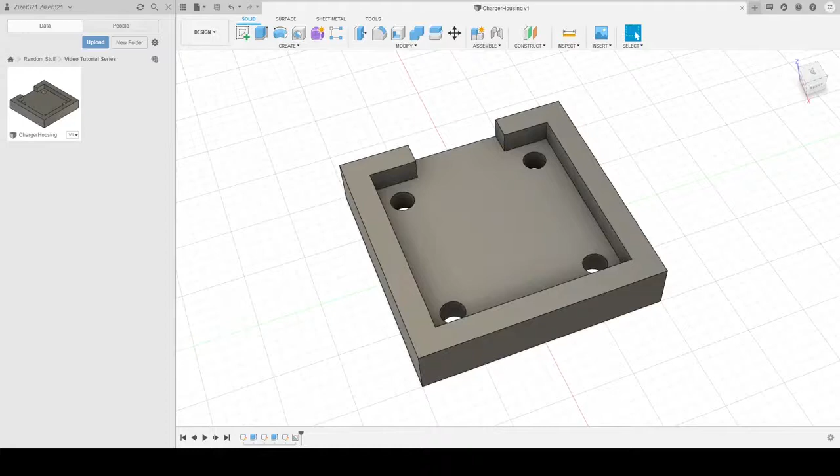Hello guys, so this is, I guess it could be called lesson 5, but that's a little bit misleading since this isn't actually a continuation of our first charger housing design. So go ahead and save that locally, not to our FTC folder, and go ahead and you can open up a new design. But we aren't going to do anything with this yet because we're going to install something from

goBILDA's website. So I'm actually going to head over to goBILDA and I'm going to navigate myself to pattern plates, and I'm going to click on one of these. So let's say we wanted to use this in a design, which in this case we do. All we have to do is go to the descriptions, downloads, and left click on this, and we'll have an option of where we can download this, yet it is unfortunately not visible in the recording software I'm using. And then you can hit save, but I've already done this, so I'm going to hit cancel.

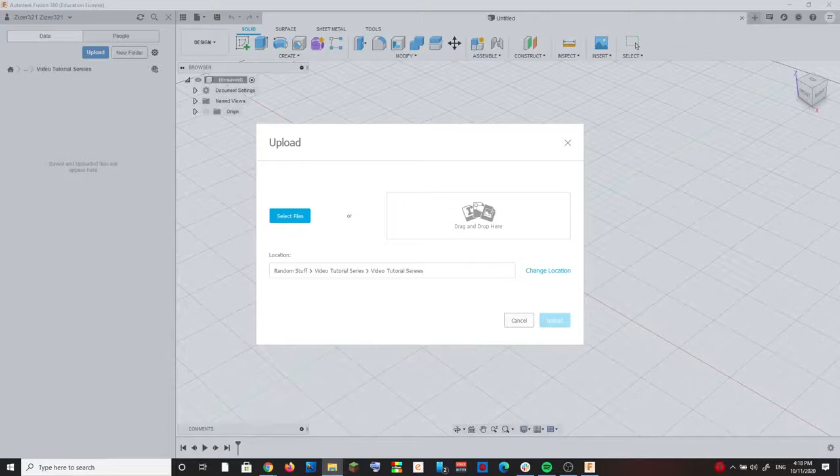And then by navigating back over to Fusion360, I can import it by drag and dropping. So even though you guys won't be able to see this, I'm going to open this up in another tab because I have a dual monitor setup, and I'm going to hit upload on Fusion360, and you see where it says the drag and drop option. I'm simply going to drag and drop my step file here. So then I can actually drag more in, and since I'm going to be using two different files, both from goBILDA's website, downloaded in the same exact way, I will hit upload.

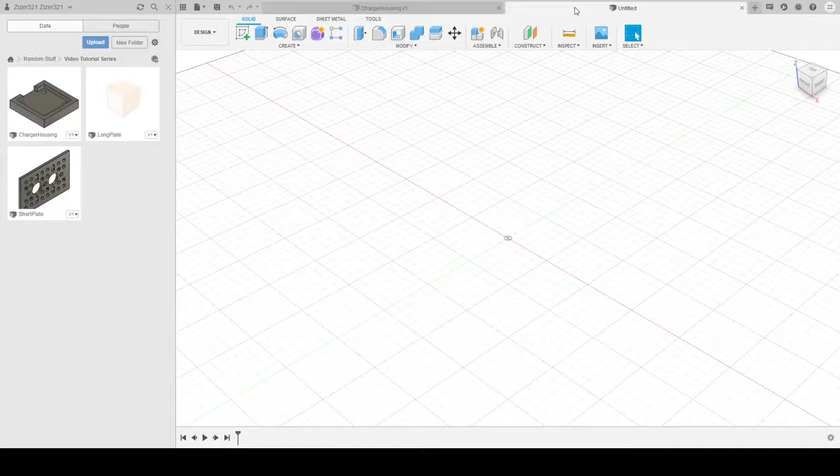I will close it down, and I will, in my untitled folder, save it. Because if you don't save it, you can't insert components. So I'm going to actually hit Control S. And I'm going to name this, let's make our charger housing component. So now, because I have saved this, I can drag and drop these in here. So I'm going to drag my short plate in, which might take a second.

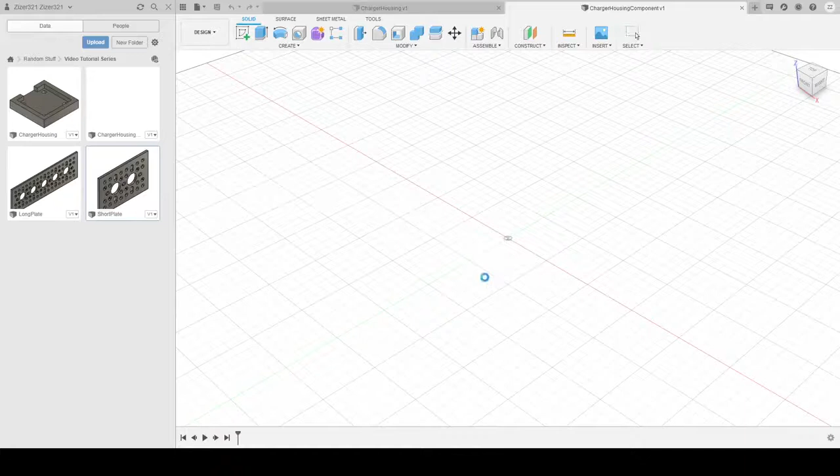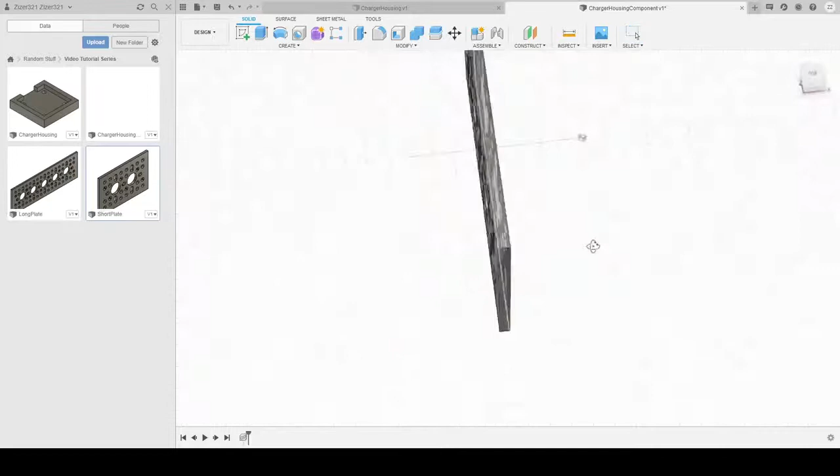And once it is in here, you'll notice that I can actually move this around to wherever I want it to be. So in my case, I'm going to move it to the origin by dragging this so the center is roughly at the origin. And ultimately this doesn't matter too much because all the components are going to be assembled later. And then I'm going to do the same for the long plate right here. And it will be in here. And now I'll drag this somewhere, maybe above it. I'll click OK again. And now I can show how these are going to be assembled together.

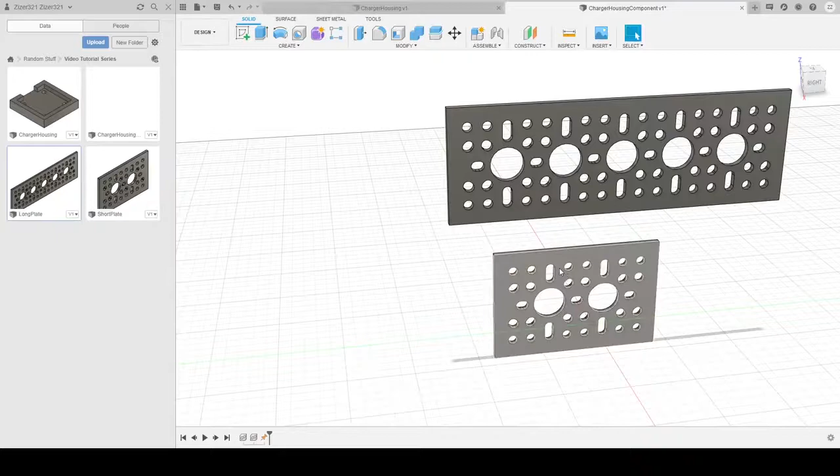So to start, I'm going to ground this short plate right here by right-clicking and clicking ground. So now you'll see I can't drag this around. I'm left-clicking and I can't drag it. But this one I can. So I'm able to drag this one around, but not this one. So now I can apply a joint between these two plates. And this one won't move, but this one will be able to move if we were to choose a joint

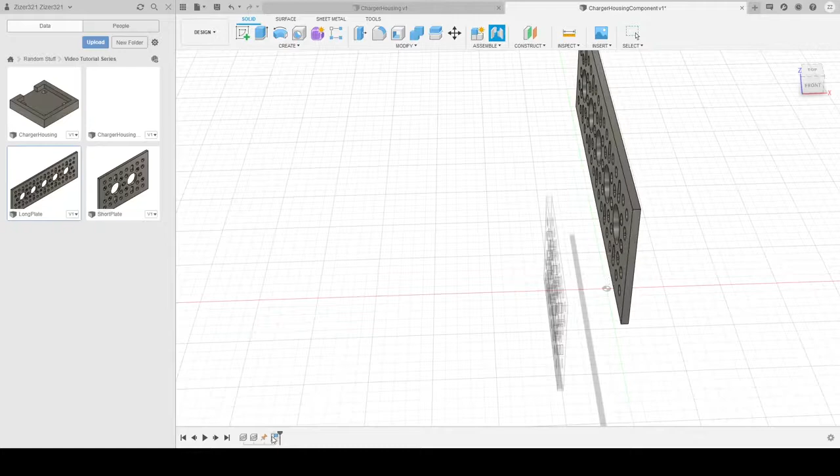type such as that. So to begin this, I will go up to Assemble and I will hit New Joint, Capture Position, which basically saves the current position of all the objects so that in your timeline it will work correctly. And then I'm going to select this right here and this right here. So you see this little animation that hopefully will show how they will be assembled, how they'll snap together. Now I can drag this, change the rotation, and actually I can even drag this, but this is somewhat counterproductive almost, because the reason we're even using the offset in a lot of cases is to align

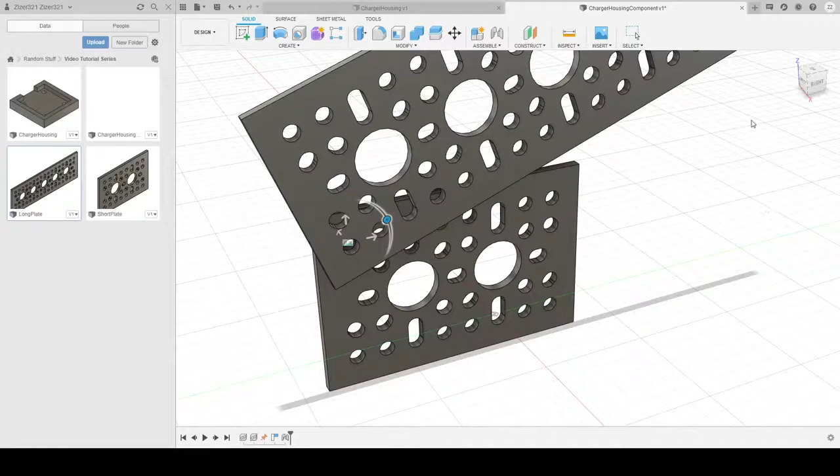them properly. So now what I can do is, the joint has already existed, but I can change the type of joint that we're using by going to the Motion tab. So if I select Revolute, you'll see that it starts rotating around, and the little animation thing. I'm just going to hit OK. And now you're going to see I can actually move this as if it had like a bolt in it at this location right here.

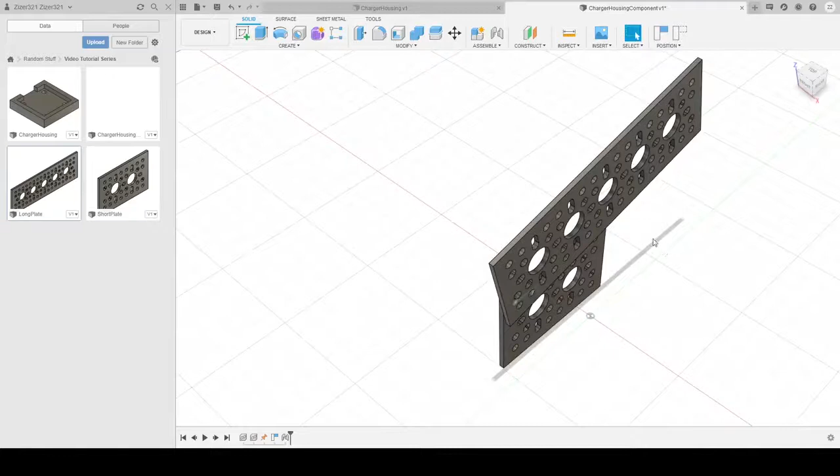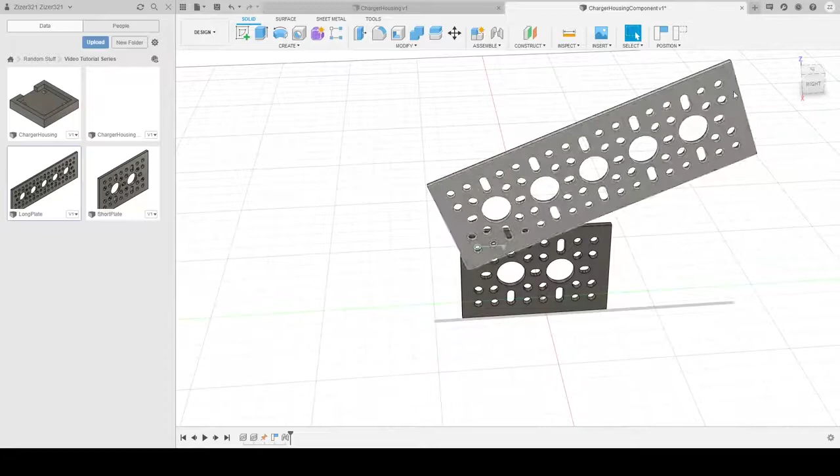And this is very powerful and quite useful for a lot of the things that we do. After all, our robot does have a lot of moving parts. So this will probably be the single most useful thing that you guys will practice here. So make sure that you guys are comfortable with it. I'm sorry for the longer video, but this is an extremely important topic, and if you only were going to learn one thing from this entire course, it should be how to do this, because this is our primary method of operation in the FTC team.